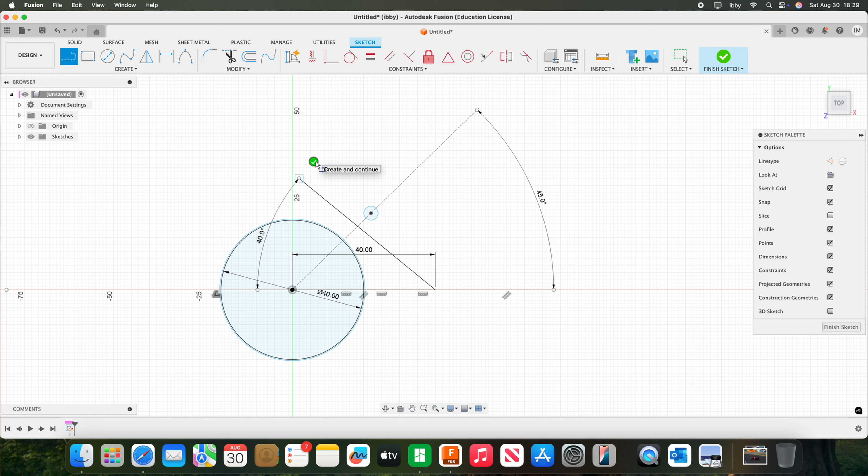The general principle is that the base will have a circle with a pin on one of the rotating axes, and the star will have the slots. They'll intersect at about a 45-degree angle, so once it reaches a certain point, it follows the arc directly into the shape of the circle. The wheel continues spinning, which brings it out, and the cycle continues.

This was taking way longer than I expected, but I'm trying to get it perfect, because most of my other designs have just been quick and not very detailed. For this one, I actually want to make it work how it was intended, exactly how I envision it. I'm now going to try and make it perfect.

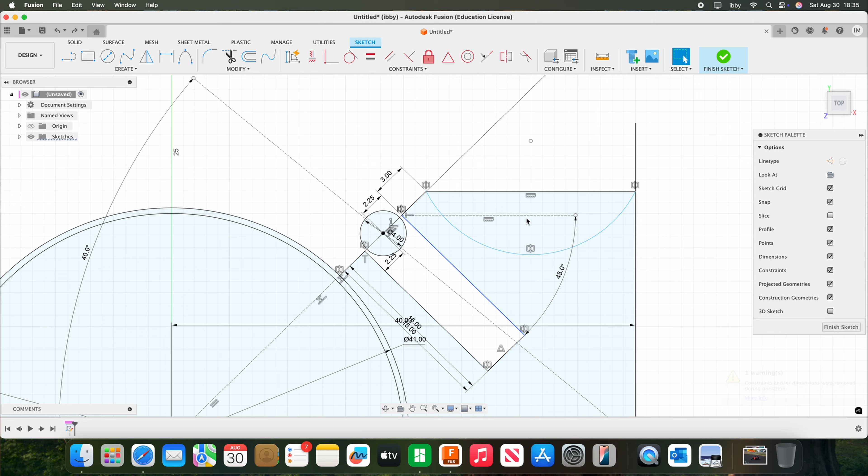So I've got the rough sketch here. I've got my circles, which will act as the main drive, and then the star on the right side. That star is where the pins are going to drive into, and as you can see, I've got that small 4mm circle, which is what's going to actually go inside the slots.

Now I need to mirror that half of the star to get the full shape, but that leaves them as two separate pieces. So I want to make a base plate that will connect them, allow for free spinning of the components, and still keep them together, so it's easy to spin, easy to demonstrate, and you can still see its full motion.

That's what I'm going to design separately right now. This took way longer than it should have, but now I am done. It's looking quite messy so far, but that's literally just a sketch. I just need to start extruding them into different bodies, and then I'll be done. So I've got the base plate, the circle, and the star.

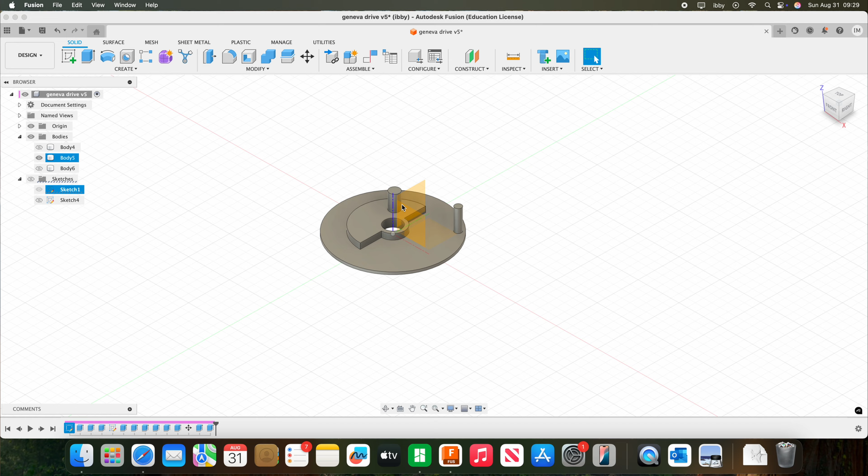The only problem is I'm not sure how well that star is going to rotate, because of that section over there and over there, they're not exactly the same height, and I couldn't figure out how to make them the same height while keeping the radius the same. So I will see if it works, and if not, I will just adjust it and reprint.

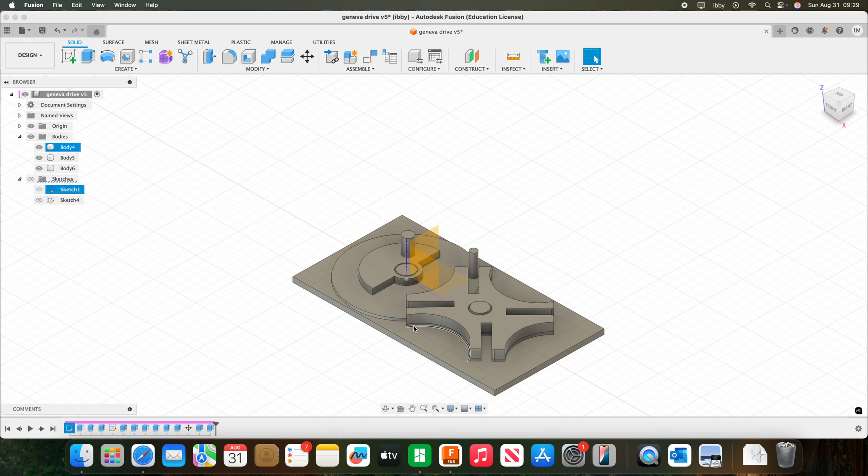Okay, so now I'm done with my design, and I've separated it into 3 different bodies. I've got the main body, which is the base plate, then a body for the driver, that circular disc, and then a body for the star. So I'm going to print them separately.

It's not going to need any supports, thankfully, and then I should just be able to get it done. It's a really simple design. It's just got the 3 discs, the 2 discs, and the base plate, and then it's got this slight lip to separate them, and it's got these extrusions.

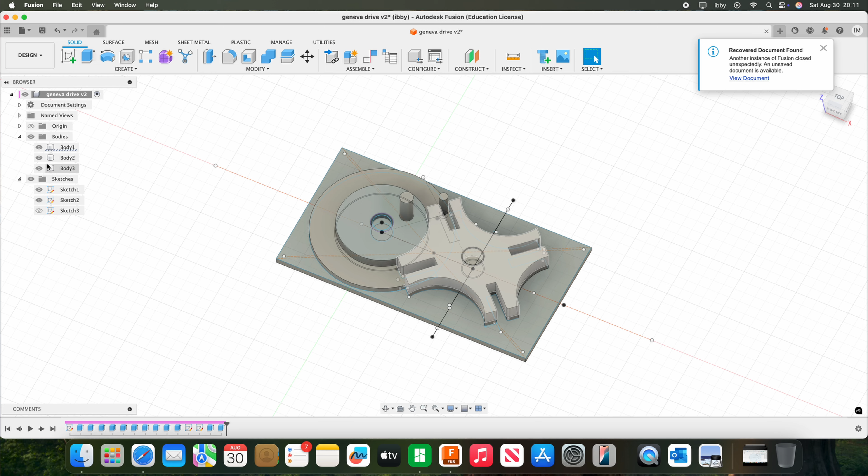That's the pin that's going to go inside of the slots, and then it's got this part over here and this part over there. What those do is just gives a little bit of a guiding hole for the other body, so you can see that one won't move around because it's now got a slot that aligns with it, and this one has the same thing over there.

So they will just be able to rotate as you turn that part, and hopefully, if all goes well, then that slot should be able to go between the rest of them. So I'm just going to put it on the build plate now.

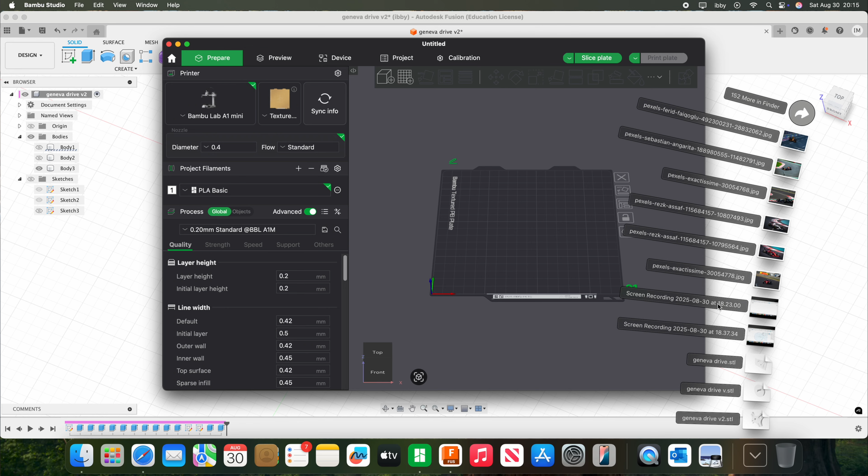I'm just going to export all of the bodies and put them onto Bambu Studio. So I've got the first one exported there, then the second one and the third one done. Now I'm going to open up Bambu Studio, go onto the prepare page, and sync the information because I use my printer on my laptop as well, then set this to print.

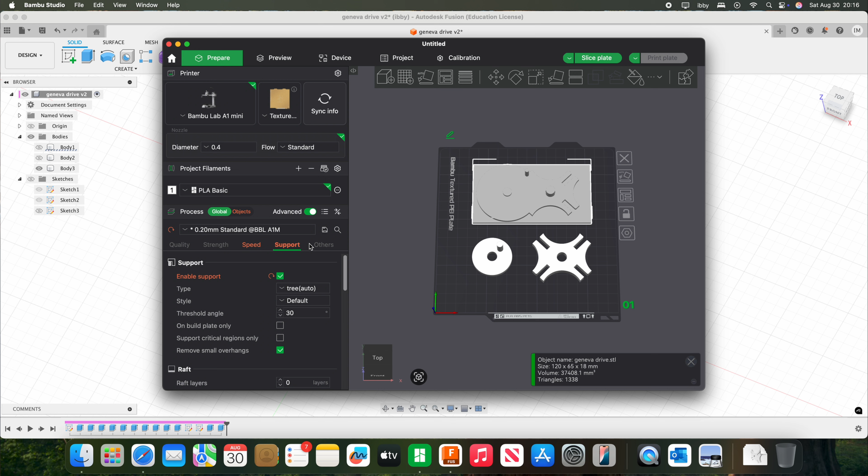Alright, so I've now got everything on the build plate. I've changed my speed settings to these ones over here, and I've changed my support so that this one has a slight brim, and everything else I kept basically the same. So I can send it over to the print plate. It's going to take an hour and a half and use 35 grams of filament, and then I can just wait for that to be done and test it out.

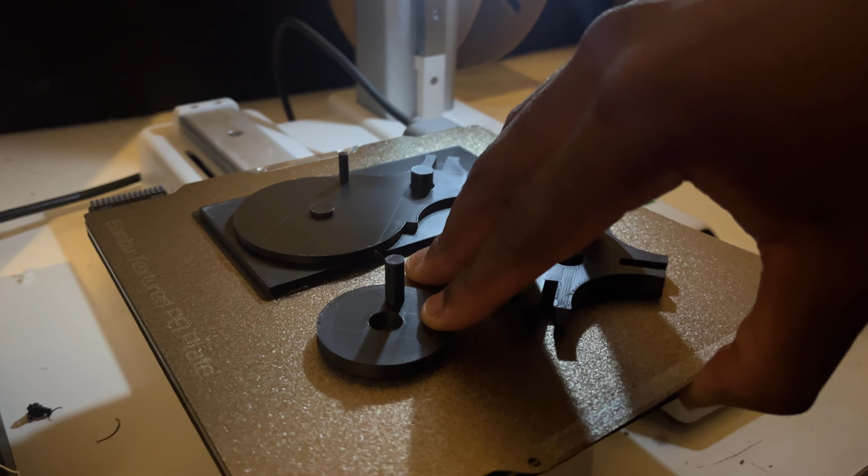So I just got finished with the print, but I completely forgot to regard one thing. The print is finished over here, and this rotates completely fine, but I forgot to make the base spin. So even though that's rotating, it's not rotating anything along with it, because it can't. So I just put a design back on the print plate, and hopefully it should work now.

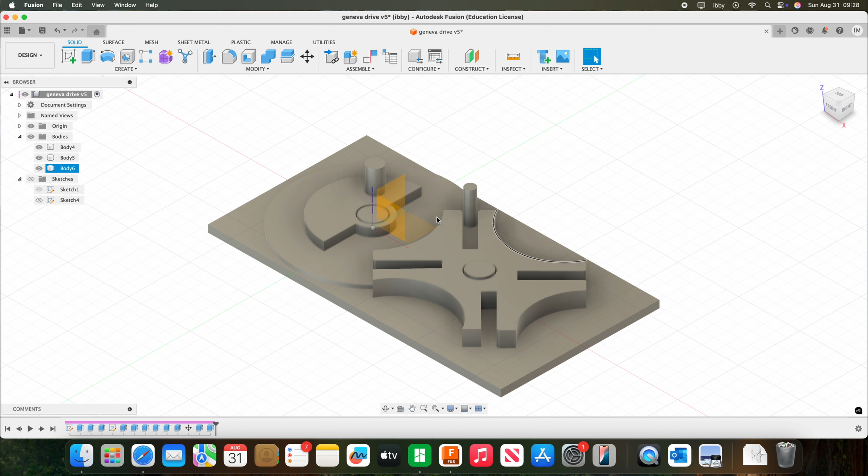Okay, so I made a few small design changes to the thing. I changed the depth of the slots, I also cut the circle part in the middle in half, so now it's a semicircle, and I increased the height of one of the pins. That way, the slots could actually go in, and the thing could fully rotate each time, and you could see the movement more clearly.

So I got that off the print plate just a few minutes ago, and I tested it out, and it's working perfectly fine now. You can see the full motion over here, where if you rotate it, the pin slots into there, rotates it again, slots in, rotates it again, and then it keeps on going in a circle.

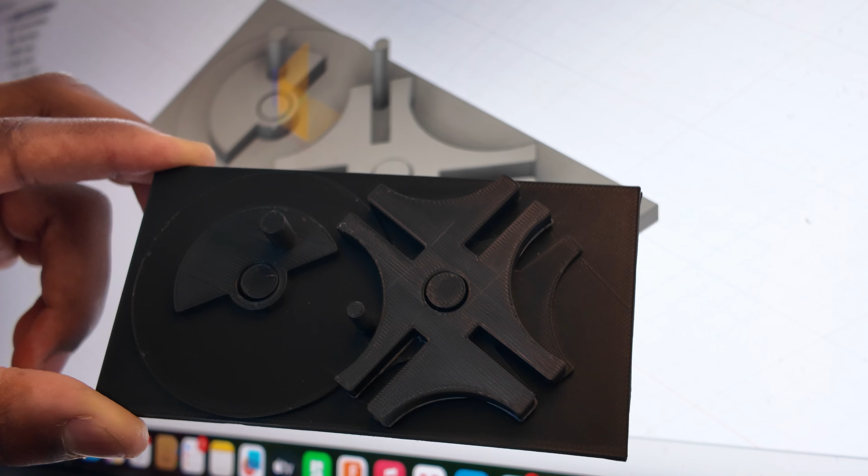And that's what it means by it only works some of the times. It's working basically like a frame rate in the camera. It gets inside, then it spins, then it has a bit of a lag, then the next frame, then it spins, then it has another lag, then the next frame, and so on.

Overall, I think that it turned out really, really nicely, and if you want to see any more science and 3D printing explanations, then check out that video over there.